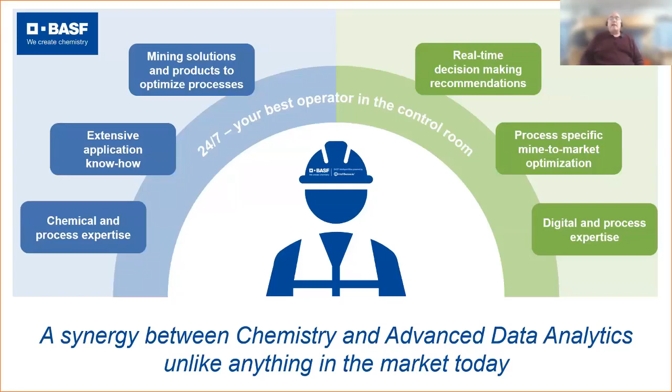So what is the Intelligent Mine? We offer optimization as a service-based solution that requires no capital investment, with an implementation time of between 3 and 6 months and immediate results. Our technology sits on top of your existing infrastructure and makes use of your current instrumentation and process control systems. This super low-risk approach allows you to implement our technology with little or no interruptions to your current systems and provides instant value. The initial implementation and ongoing subscriptions have a target return on investment of between 5 and 6 months from implementation.

The applications themselves are all out-of-the-box solutions. They're ready now, ready for each process from the mine to market value chain. What we do is initially deploy, configure, and calibrate the applications in the area of most need for you. Then additional applications can be added to your system. Once fully connected, each of these applications optimizes its own behavior, but also works with the other applications to produce overall process efficiency.

They all have a decision optimizer incorporated into each of them, and this is there to help provide real-time set point recommendations based on process improvement targets, which are typically set by you, the user. The system then provides recommendations to control room operators for optimized control.

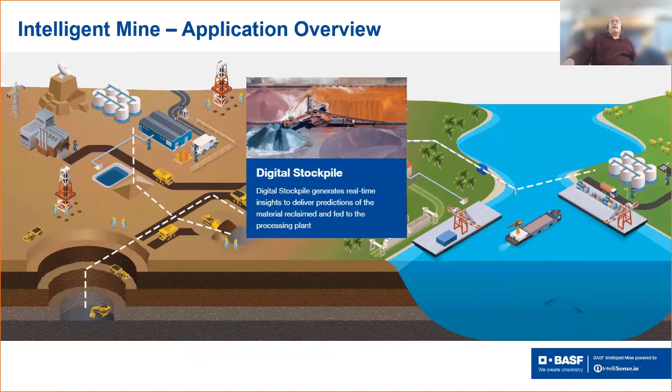Our heap leaching application uses the same models as our stockpile, and it tracks spatial deposition and reclaiming from heaps. This improves the visibility of the contents of the heap at a granular and spatial level, and allows increased metal recovery by adjusting liquor volumes and residence times in response to knowledge of what is and where it is in the stockpile. The application also predicts the difficulty of reclaiming a specific heap and recommends maximum reclaiming rate targets to avoid rotary bucket excavators getting stuck, causing downtime and lower than normal yields.

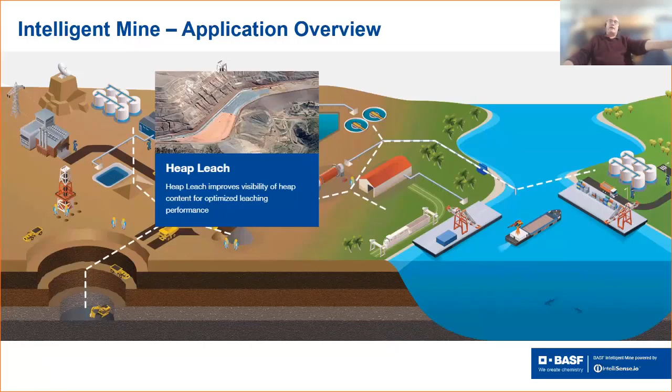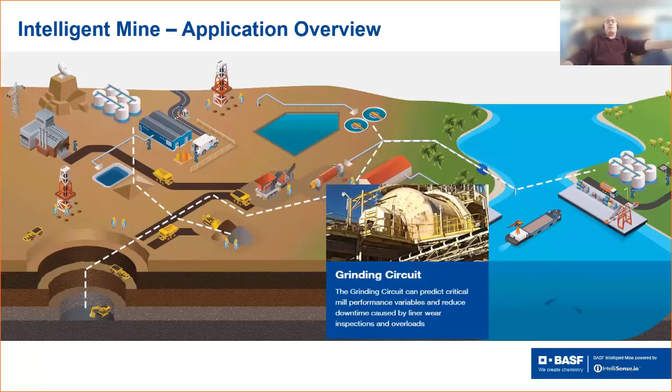The grinding application: here we focus on providing information about the current state of your mill, looking at things like ball charge, liner state, and the actual contents of the mill. From this, we can start to predict things like mill bearing pressure and mill overload probabilities, which allows your operators to make proactive decisions to avoid overloads and associated throughput issues.

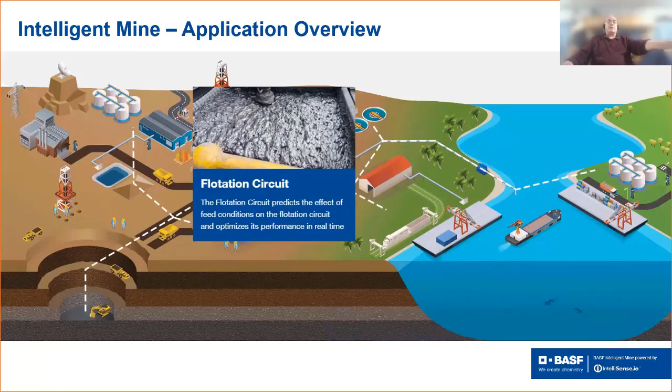Now, here we provide a lot of virtual sensors, things like gas holdup values in real time. And we integrate with the IntelliSense material model to give insights and predictions into the effects of your feed conditions on a circuit. This allows your operators to optimize the performance of the actual flotation circuit in real time.

Pipeline pumping: this application simulates pumping schedules in pipeline systems hours into the future, and it optimizes pumping to balance the specific energy consumption with pumping switches according to operator preferences. It automates your pipeline operations to meet variable demand while maintaining the optimal balance between energy consumption and pump wear, freeing up operators to focus on other tasks.

The purpose of this application is to eliminate the CapEx that would normally be needed to install VSD drives, as you can run this off normal switching paths.

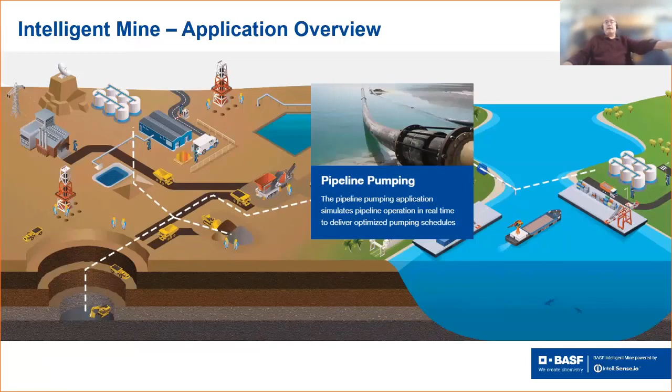And of course, the thickener circuit. Now, before we talk about that, let's have a little talk about the architecture of the intelligent mine, and just reiterate what we have. What we need to remember is that the intelligent mine sits on top of all of your existing processes.

So the instrumentation that you currently have on site, the sensors, the data you collect, both historical and live, plus your existing control systems, are all used as inputs and outputs for our system. brains.app then provides an integrated platform on top of it to analyze that data lake and create models from that source. It hosts our applications and supports the prediction, optimization, and simulation engines for each of our applications.

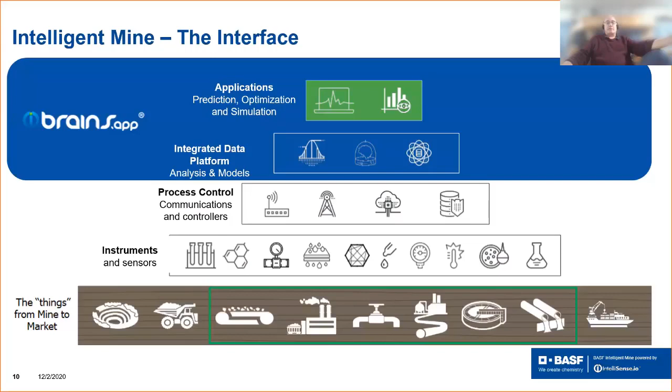Specifically the thickener: many operations experience the same thickener problems all over the world, and our application tries to address those challenges. Most thickener circuits are generally characterized as unstable, if you're lucky, with dynamic feed characteristics associated with ore body changes, variable feed rates to the thickener, maybe changes in your feed density, changes in pH.

These are all compounded by poor flocculation addition, maybe flocculant dilution, and even the mixing conditions. Thickeners are often controlled very reactively by your SOP, with large changes being made to control set points as your operators near torque, bed pressure, or underflow density limits. Additionally, differences in control philosophy across shifts or even across individuals, added to staff turnover and loss of process knowledge, also impacts overall operational reproducibility.

The result is further instability, and sometimes thickeners are then run from one extreme to another.

As a result of these challenges, balancing thickener operations to obtain consistent, stable results is difficult. This results in the density of tails or concentrate not being optimized, water recovery not maximized, chemical usage not balanced to actual performance outcomes needed, and the thickener can become unstable, becoming a potential bottleneck to the rest of the plant. By applying the BASF Intelligent Mine thickener application, the result is a thickener process that achieves the targeted KPIs set out by the site, giving transparency on cost and performance, plus live simulations and analysis tools to allow your team to understand the process better.

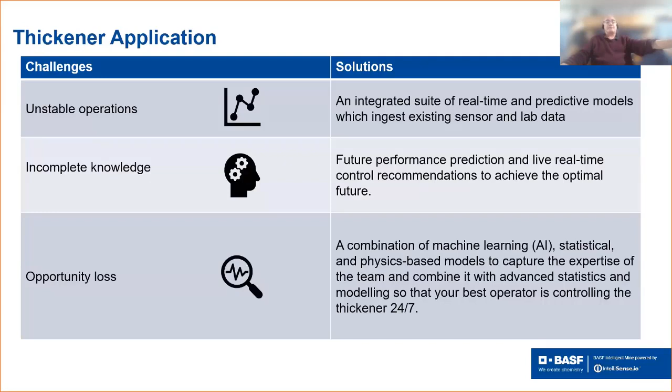This is an example of the sort of control improvements that can be seen when you run through the actual thickener application. What we have on screen here at the bottom is a bed pressure sensor, so you've got before, during, and after. What you find is when brains.app takes control and starts giving the optimized recommendations, our control improves dramatically.

So what we've done here is shown you that in a histogram. The original control is this orange line, and you can see that we regularly pass the limit. But once we get under IntelliSense control, the system pushes hard up against the limit. These few items here that are just above the limit, that's really the beginning as we've got it back under control. Just quickly looking at it, 31% of the time you're breaching limit under standard operation, but under the IntelliSense model, we're at 5%.

This resulted in changes to your underflow density. So when you now look at underflow density, the entire curve is now moved to the right, and the overall average underflow density has improved. So this is the result of actually implementing the thickener control software.

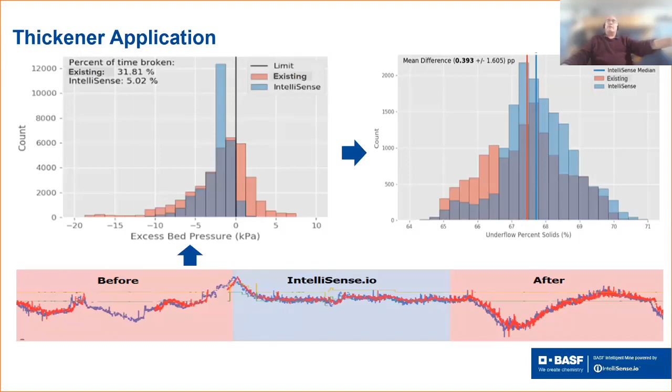So what we're going to do now is get Neil to run through a video which will actually take you through the actual product.

Thanks, Ken. My name is Neil Knoblauch, Product Lead at IntelliSense.io. I'm really excited to give you a demonstration of our thickener application today.

Mining companies lose out on significant revenue due to inefficiencies and instability in subsequent processes. Nowhere is this more true than with thickeners. Whether concentrate or tailings thickeners, these are generally processes with large residence times, and there's often a lack of clarity, excuse the pun, of what's actually going on inside them. So by the time you realize what's going on, it's often too late. You might need to stop to hose out the thickener because the solids have built up beyond repair, or the thickener might have started sliming, contaminating process water.

Control systems out there are battling to stabilize, not to mention optimize, these circuits, as they fundamentally cannot cope with these challenges. At IntelliSense.io, we developed an optimization system to specifically address the challenges that we've seen in industry. We equip and empower metallurgists, operators, and plant managers by providing a degree of transparency not available with other systems. I will now show you the thickener circuit optimization application in action, or as we call it, the thickener application.

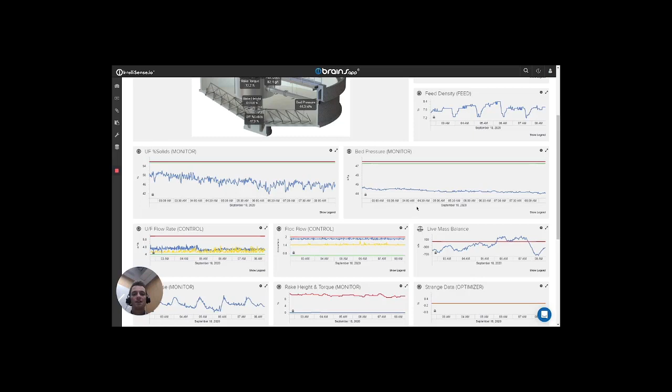What I'm currently showing you is an example of a performance dashboard. Data from different sources - plant sensors, logs, lab analyses - all of these are in one place, coming into brains.app. And we use this to create a digital twin, or what we call a digital process model, of your thickener circuit. Using our in-house machine learning technology, we use your historical data to create a digital copy of your thickener circuit. This digital process model allows you to have an at-a-glance view of how the thickener is performing.

With this performance screen, you can not only see historical data and live data, but predictions of the performance of your thickener into the future, an hour into the future as well. Here you can see feed variables, your feed density and your feed flow rate. You can see monitoring variables, your underflow density and the bed pressure - these are the variables that you want to get right. And also control variables, the variables that you can tweak in order to steer the thickener. In this case, the flocculant feed flow rate and your underflow flow rate.

The feed going into your actual thickener also goes into this digital copy, or digital process model, and this means that we can predict how it will perform into the future. So as your feed changes, you will now know what will happen downstream, whether a limit will be breached, and you will be able to act before anything goes wrong.

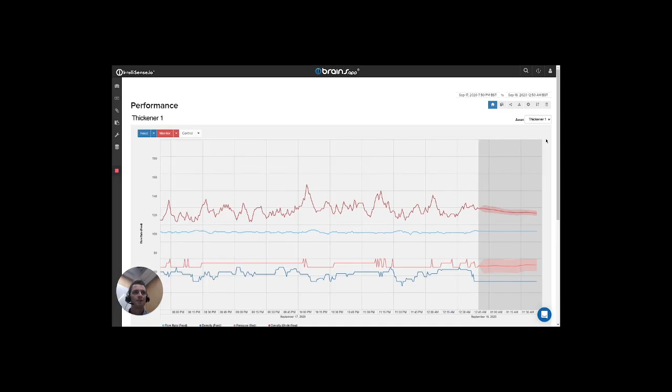Now you can not only predict the future behavior of the thickener circuit, but you can actually optimize it as well. So instead of predict, we can click on optimize. Right now you can see that the control variables are constant and that your underflow density will trend downwards. If we click optimize, we'll see what it does.

In this case, for this moment, it increases your underflow density. It increases the flocculant flow rate and decreases your underflow flow rate to lift that underflow density into the future. Like a car GPS, it always starts where the process is, where you are, and maps out the road to where you want to be, as defined by the value driver. And in this way, it ensures that your thickener is consistently pursuing your process KPIs.

Now, how are these recommendations implemented? Under the flocculant flow rate and the underflow flow rate, how are they actually pursued by your process? There are two options here. The first one, and the one we normally start off with, is that these recommendations are provided to your operators.

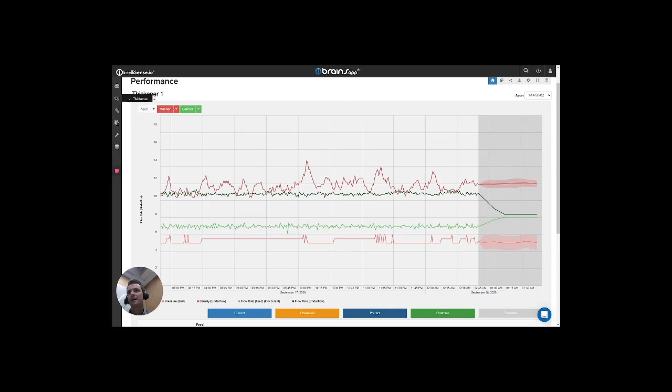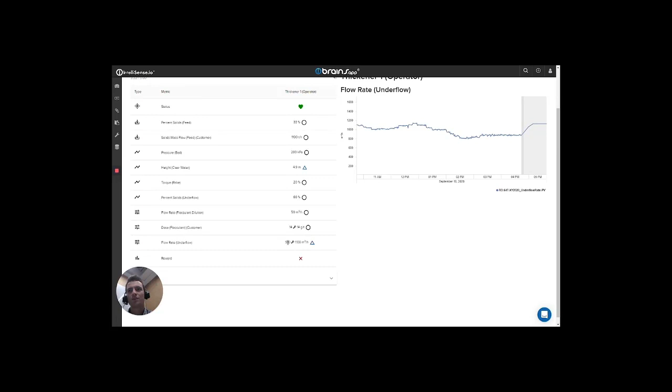This is done via the operator screen. Periodically, in this case every 5 minutes, the sound goes off and a new recommendation for the control variables is provided to your operators. For example, if we use underflow flow rate, you can see that the current underflow flow rate is around 880 cubic meters per hour. Within the next hour, we want it to lift to 1,100 cubic meters per hour.

But for this next action, it recommends to the operator that they need to change it to 910 cubic meters per hour. The operator will see this when the sound goes off and then enter this value in their SCADA as a set point to a lower level control system, or they might manipulate a corresponding pump or valve directly to achieve this. This means your operators are engaged and empowered to perform consistently irrespective of shift, and this is why we say that we give you your best operator 24/7.

The second option for how these recommendations are provided to your system is to do this automatically, writing them back into your plant DCS or PLC as set points to a lower level control system. For example, the underflow flow rate of your thickener might be controlled by an underflow pump, and this flow rate set point might be written back to be pursued by this control loop, so it speeds up the pump to get the flow rate to where it should be.

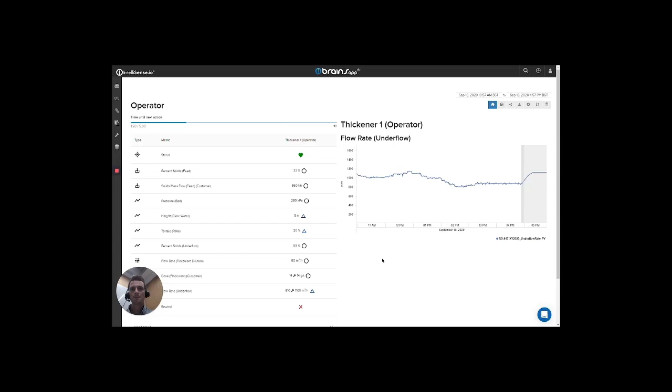If I go back to the performance dashboard I showed in the beginning, if something were to go wrong, you would be able to view your historical data and see: did something go wrong in the feed into my thickener? Did the operators perhaps fail to implement the control variable recommendations? Did my process sensors return any strange data? And you'll even be able to see what's driving the optimizer actions at all times.

This adds transparency to ensure that the thickener app is not a black box, but that the site personnel know what's going on and why at all times. For example, here you can see that the optimizer is driven mostly at this point by achieving a desirable flocculant dosage and maximizing underflow percentage solids, and the relative importance between these has been set up in the value driver.

Additional transparency is added by the predictions having uncertainty bands. Uncertainty bands accompany all our predictions to give operators and metallurgists alike an understanding of how sure the digital process model is of this future, and this depends on things like data quality. You can see the uncertainty bands around the monitored variables.

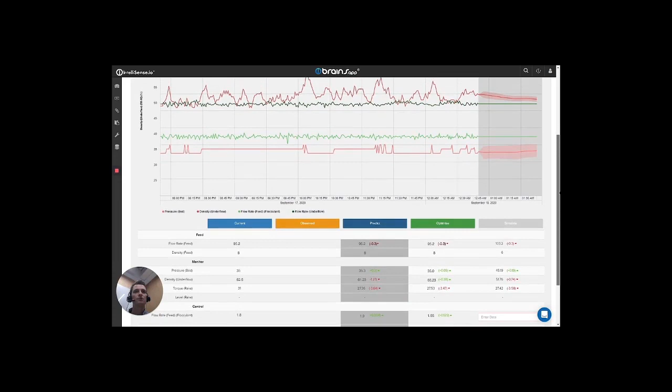The last thing I want to show you is our simulator. In addition to being able to predict and optimize performance, there's also the option of being able to simulate behavior. This is a non-intrusive, risk-free practice tool, a way to coach new employees and operators on how the thickener circuit actually works and what they can expect from its performance.

So under simulate, if I were to enter new control variable values, I can click simulate, and the control variables would jump there. This is sent into the digital process model, and changes in the monitor variables will be shown here. This is something that can easily be used in training and coaching.

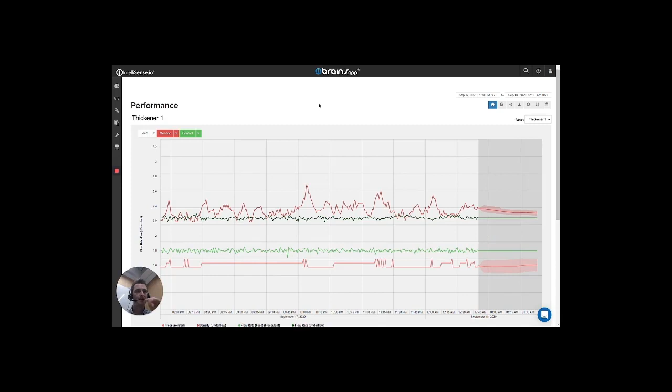I think that's all we will have time for in this session, and I'm looking forward to hearing your thoughts and your questions. But let me just quickly recap what we have looked at in this session.

We have looked at how the thickener circuit optimization application provides you with predictions of how the thickener will perform as the feed changes. We have seen how the value driver that sets the objectives for the thickener performance are placed in the hands of a metallurgist, so you define what success means for your plant and your thickener circuit.

And we've seen how this then provides you with an optimizer that optimizes the thickener and outputs optimal control variable recommendations that are either shown to your operators, so they implement them, or are written as set points to your lower level control systems. I've also shown you additional features such as the simulator and our financial model that can show the room for improvement or potential opportunity, and so on.

All of this to optimize thickener performance and to consistently hit your KPIs, things like throughput and profitability, but also to create a common in-depth understanding of how the thickener is performing and how to best improve it.

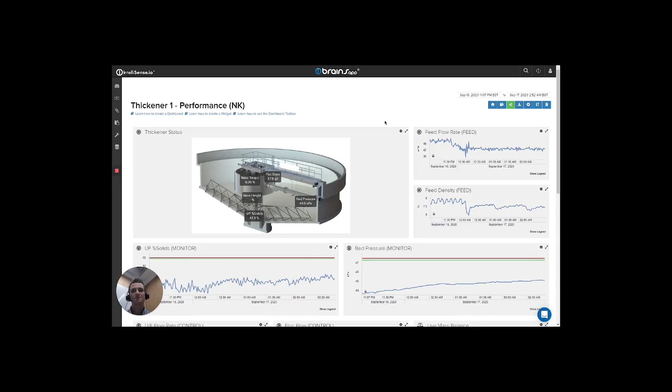We believe that the thickener application is unique in the market today, and that it will also be able to provide you with significant value, so that you always have your best operator 24/7 driving your thickener to optimal performance. I'm looking forward to your questions.

Hopefully that demonstration has given you a nice hands-on feel for what the product looks like and the benefits it can actually deliver for your thickener circuit. We think that combining BASF chemical and process expertise with the advanced data analytics and software engineering of IntelliSense, we've created a really unique product that's ready for you to use right now.

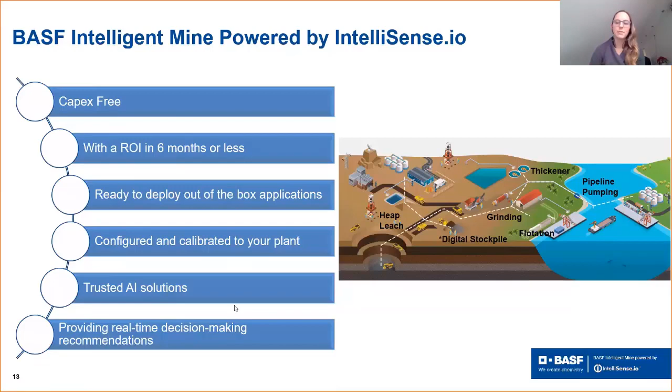We've already received some interesting questions. First, could you please share where this mining solution has been implemented so far? Are there any references? Yes, there are.

IntelliSense has been implementing these applications globally for over 4 years. Some of the majors have implemented it. Probably our biggest opportunity at the moment is with Anglo American, so we're dealing with multiple sites with those guys. But there are also other big majors in South America, gold mines in Kazakhstan, and we've had opportunities here in Australia. Some of the names we can't share because of confidentiality, but it's multiple locations around the globe.

Perfect, thank you very much. Another question: how do you protect customer data? The number one thing to remember about data is that the data is always the customer's.

What we try to implement here is a hybrid cloud setup, using a combination of storing information directly on your server on-premise, but also in the cloud. We use all the latest cloud technology and the normal security needed to keep everything as secure as possible. But the most important thing to remember is that we're extracting the data out and then giving you a recommendation back, so at no point are we opening up your system to attack.